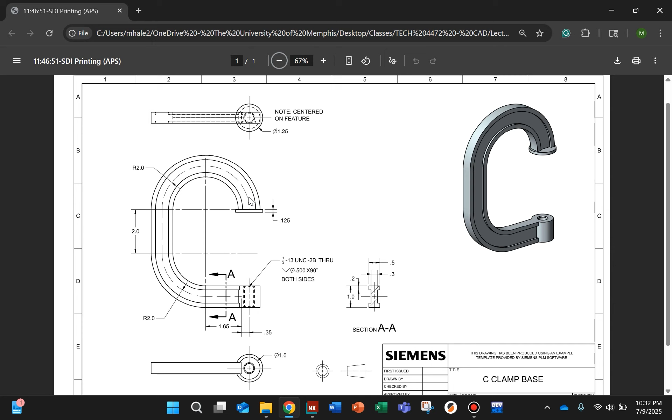So we'll use that to create our C-clamp base. With NX open, we're going to start a new model. We're going to be in inches.

We'll start with a sketch. Our sketch is going to be in the front plane, so we'll go ahead and sketch on the front. What we'll be doing is sketching this shape here - this is the cross section from this section plane right here. We will draw this shape and then we'll extrude it, we'll sweep it along a path that we make.

Back in NX, I'll use my profile tool, and we're going to use the mirror tool as well. So I'll sketch half of this, mirror it, and I'm going to leave off the top and bottom lines whenever I do this first half, dimension everything, and then when I mirror it, I'll go ahead and add in those top and bottom lines.

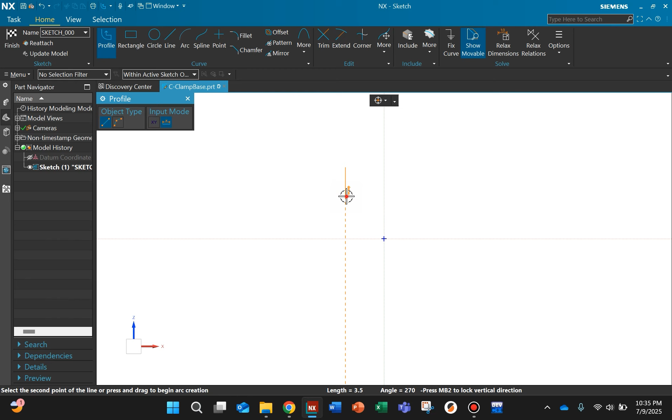We want to make sure that these two sides are symmetrical. We could have just drawn half of this and then mirrored that and mirrored this again, but we'll go ahead and just go with this approach.

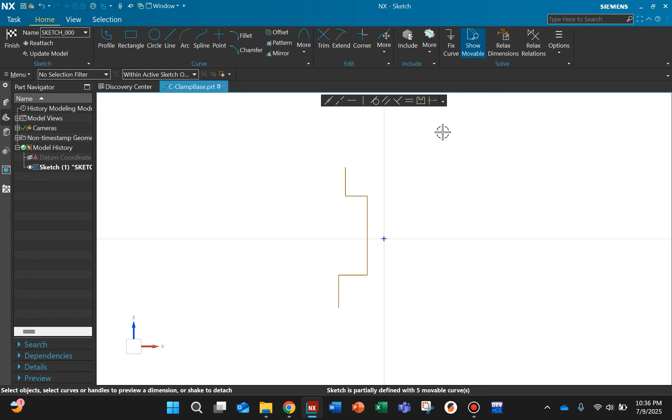So I want to make sure that this line and this line are vertically aligned, and also that they are the same length. I'm going to turn on create persistent relations. I'll do a make vertical, pick a point on this line and a point on this line, and say okay. Now, if this line were to move over, that line will move as well.

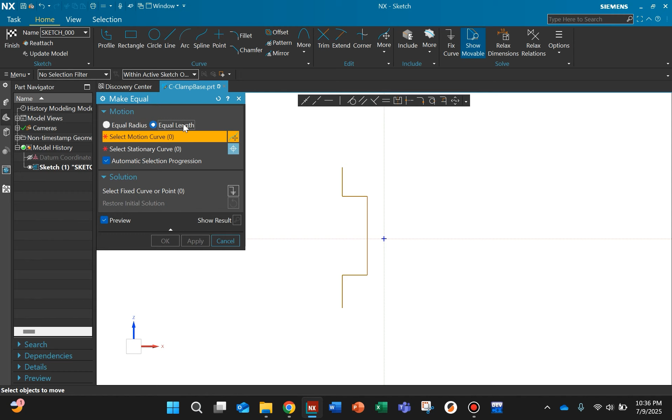Also do a make equal - an equal length constraint. I want this line and this line to be equal. I'll say okay. The other thing I'm going to do is I want the midpoint of this line to be coincident with my horizontal axis here. So I'll make coincident the midpoint of this line to our horizontal axis. I'll say okay.

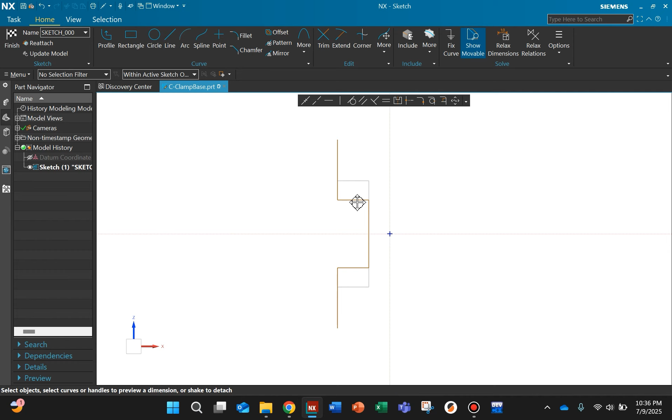Now everything's symmetrical across this horizontal axis. So if we moved one side, everything's going to move symmetrically with the other side. So let's go ahead and add our dimensions here.

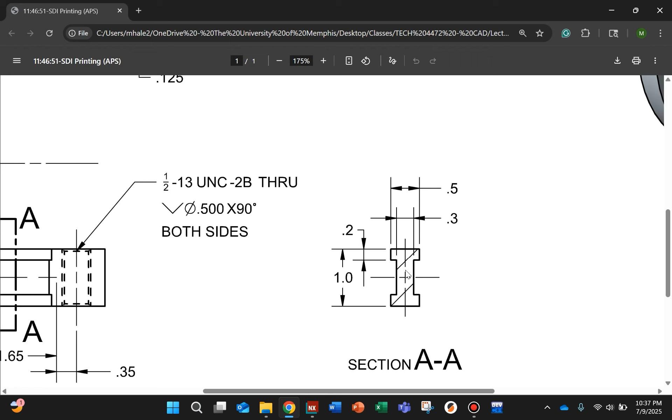This top line is 0.2 inches. The overall height is 1 inch. Overall width is 1/2 inch. And then this web is 0.3 inches. So let's go ahead and add those in - this top line here is going to be 0.2.

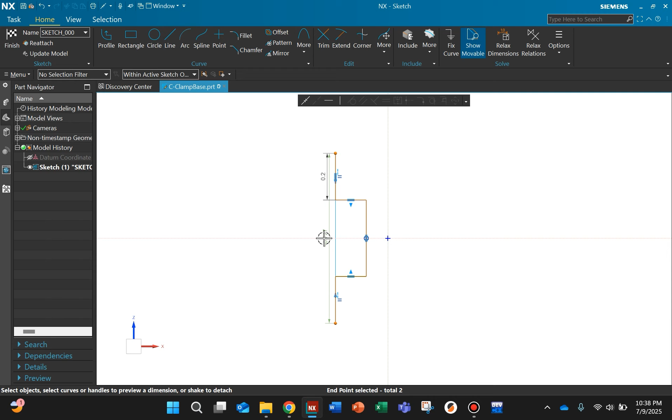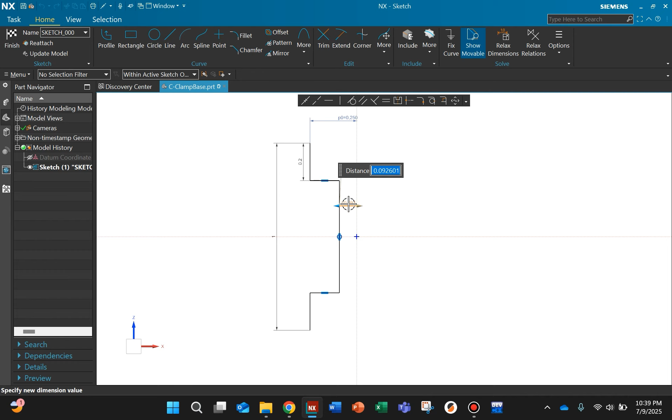Our overall height, from that top point to this bottom point, is 1 inch. The overall width is 1/2 inch, so I'll say from this line to the center equals 0.5 divided by 2, since we are dimensioning this from the center line, and then when we mirror this across, this will be a total width of 1/2 inch. Same thing with our web thickness here - this is equals 0.3 divided by 2, so that when this mirrors over, the total width is going to be 0.3 inches.

Now I'm going to go to mirror. Notice that sketch is fully defined right now. Now we're not done with this, but we do need this to be fully defined right now before we do the mirror. If your sketch is not fully defined, make sure you have those constraints that we added in and make sure you have everything dimensioned correctly.

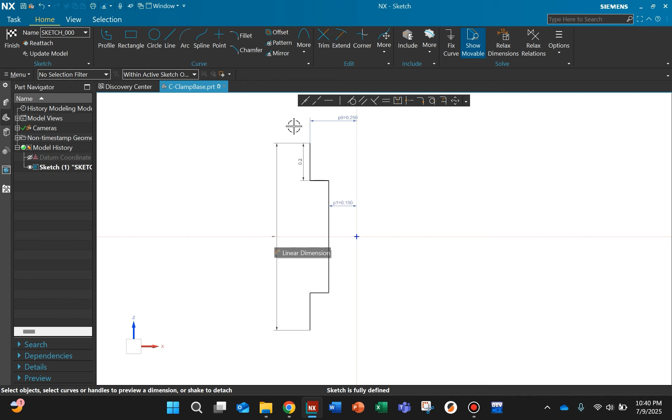So we're going to go to mirror. Before I select curves, I'm going to go down to settings. I'm going to make sure that we have create persistent relation turned on. We don't really need to convert centerline to reference because we're referencing the vertical axis here, but that's fine.

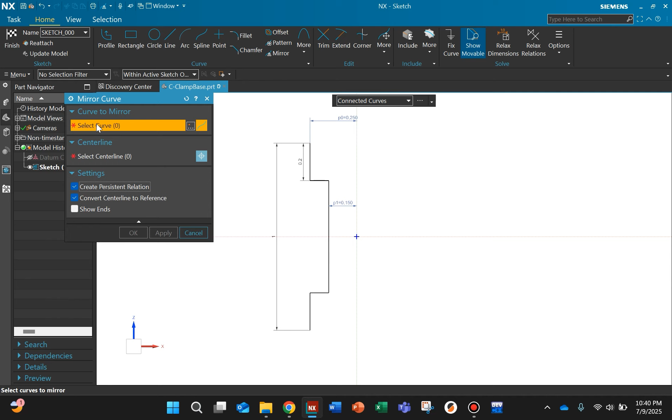The curve to mirror - we're going to make sure that we have all of our lines selected. And then we'll click on select center line, and I'm going to click on the vertical axis right here. I'll say OK. Now we have this mirrored across.

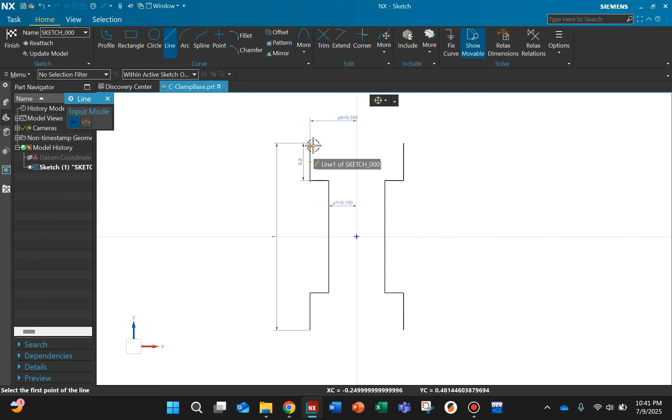I'm going to go to my line tool, and I'm just going to connect these top and bottom lines together. Sketch is fully defined, and we have our completed 2D boundary. I'll say finish.

And that is the cross section of our C-clamp base. Now to take this and create the actual C-clamp, we're going to use our sweep. To do that, we're going to need a guide, a line for the sweep to follow. So when we do the sweep, we'll select this sketch and say sweep this sketch along a path. We'll create another sketch from essentially the plane that we just sketched this section view in, and we'll create our path.

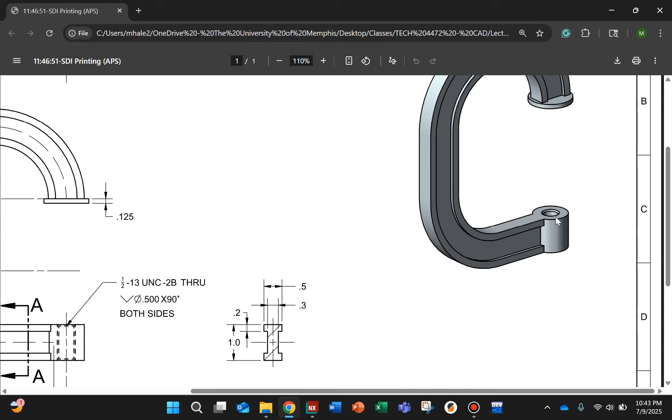Okay, so this is the center path for us to follow. I do want to point out that the section is right here. But whenever we create our path, we're going to start it at this point, where this round feature intersects our frame. So our sketch that we just created is basically located right here, not where we have our section. The section is just showing the shape.

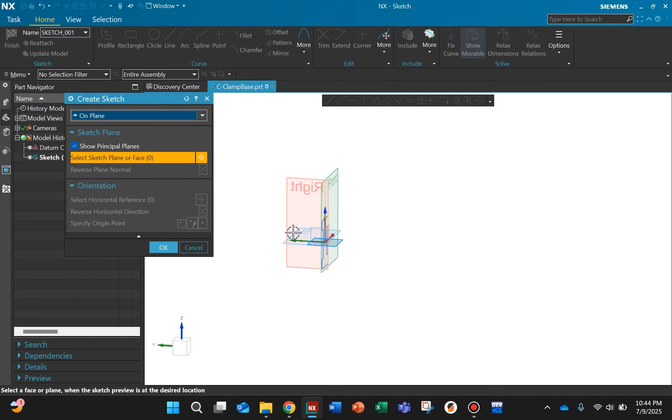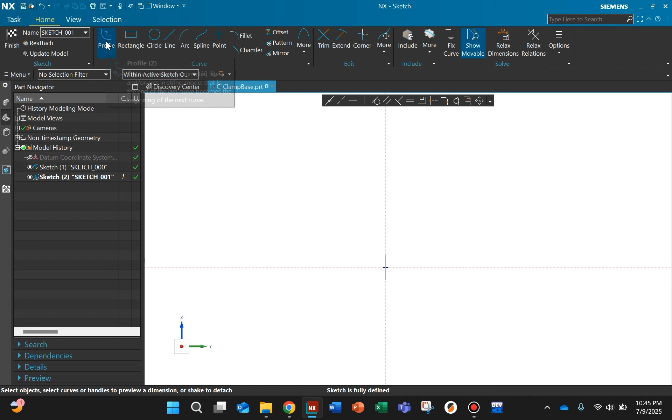So back in NX, we're going to create another sketch. This time we're going to sketch in our right plane. And here's the sketch that we just created, so we're going to create our path for the sweep to follow in the right plane. I'll go to my profile tool and make sure that we start at the origin here, at the sketch origin.

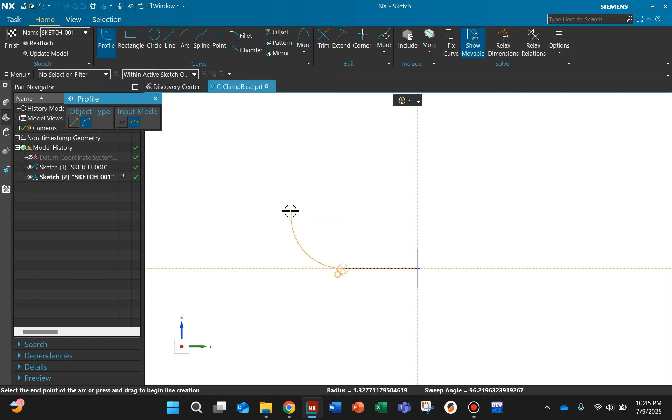And we're going to create our basic shape that we have. So we come out, and then we have our arc. I'll make sure we start here. Have our arc. And then we go vertical distance. We have another arc here. We just want to make sure that the end of this arc has a horizontal constraint with this line here.

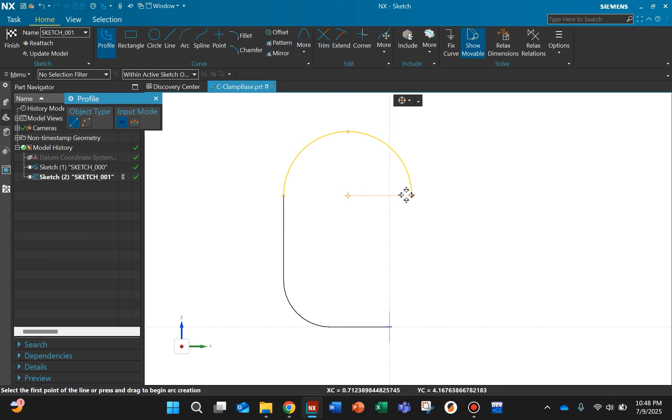If you don't get it in, that's fine, I'm just going to add it and place it there. We want this point here at the end of the arc to be aligned with this point, but I'll add that in just in case we didn't get it there. So we should have something that looks like this. We'll go ahead and start adding in our dimensions here. So we're done with our profile tool.

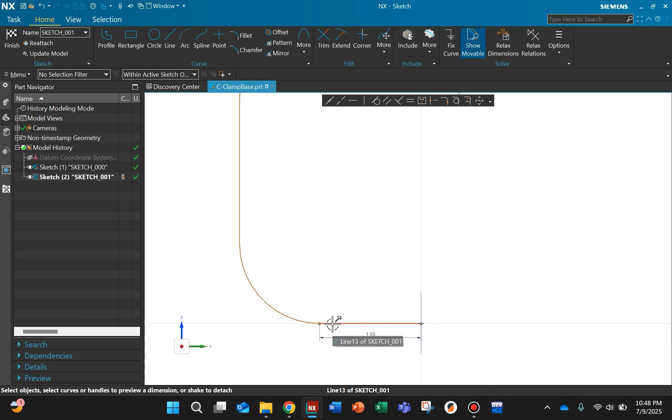Let's start adding in our dimensions. So this line here is going to be 1.65 - that is the length of this line up into where the arc begins. Then the arc has a radius of 2.

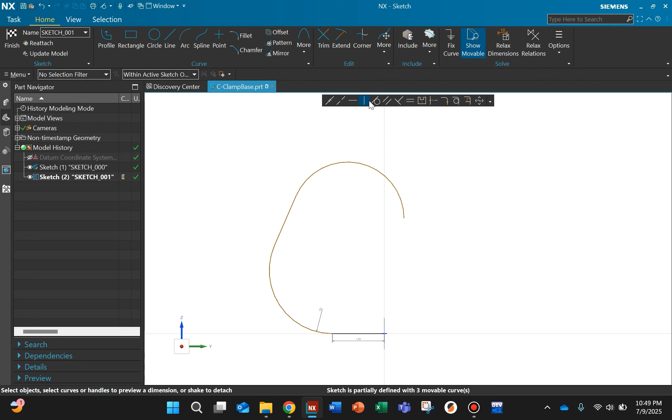And if something like this happens, that's fine. What we'll do is a make tangent between this line and this curve. We'll say OK, and then we'll do a make vertical on this line.

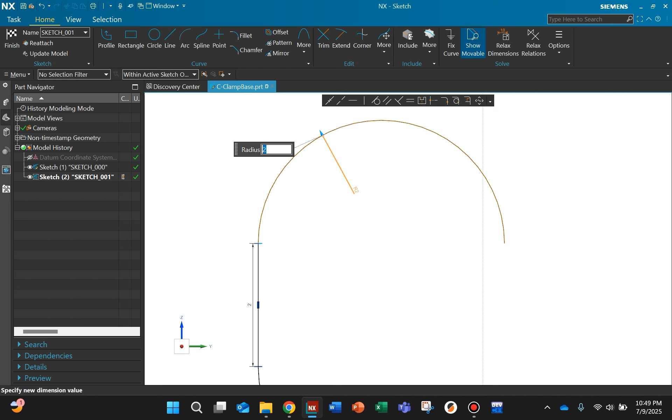Clear that up. This line, the length of this line, is going to be 2 inches. This arc has a radius of 2 inches as well. We could also do a make equal constraint and say that those are going to be equal, but we'll leave it at that.

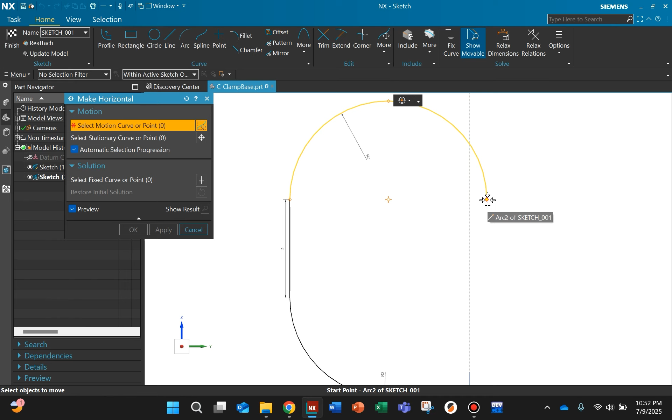And you want to make sure that this point here and this point are horizontal. So we'll do a make horizontal constraint where we select endpoint and the endpoint. We'll say OK - make horizontal constraint with the endpoints so that they are horizontally aligned together.

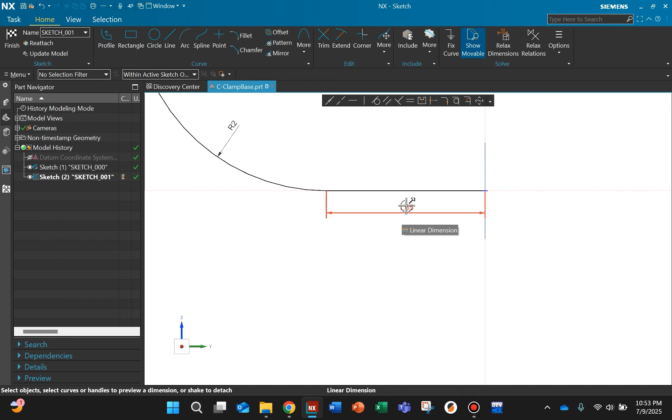The radius of 2 inches on both of the arcs. This vertical line is 2 inches. This horizontal line is 1.65 inches. And we'll say sketch is fully defined. We'll say finish.

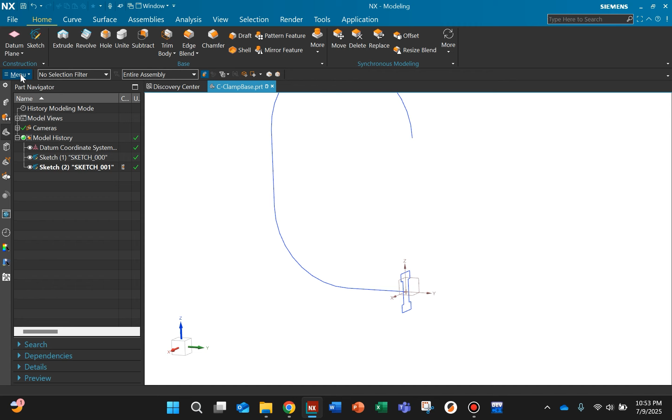Hopefully you can see kind of what we're doing here now. So here is our section view. Here's the section plane of our C-clamp base. And we want to sweep this along this path. So to go to the sweep, we'll go to menu, over here, and go to insert. And down about here we see a sweep.

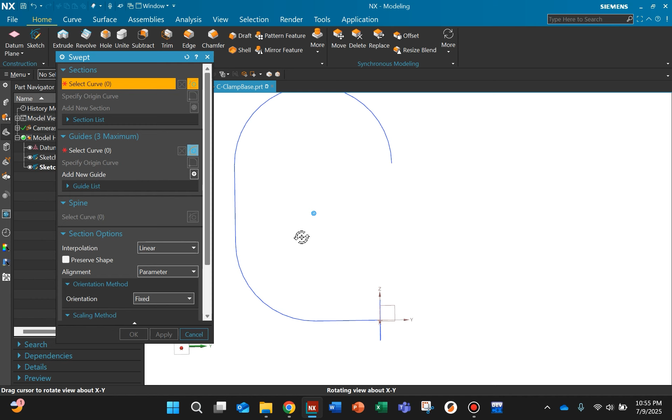There are a few options for the sweep. We want just the swept, so we do sweep, swept. What the swept tool is going to ask us for is the curve - the section that's going to be swept - and the guide, our path that we select. We can have more than one, we're just going to have the one here. There are different ways that we can actually sweep this section along the path. We'll go to preserve shape, but we can worry about that here in a second.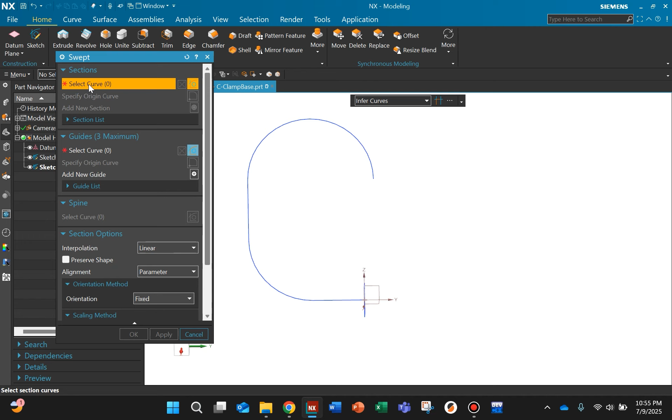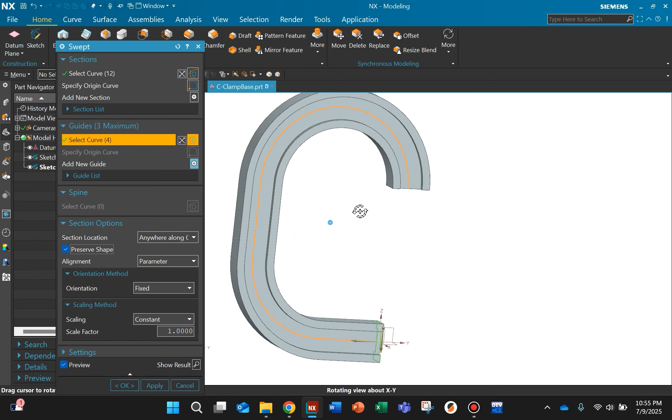So the section that we want to select is going to be our profile shape. We'll go to select curve, and select the sketch path that we created. We want to make sure that preserve shape is checkmarked, so we're preserving this shape along this path. And we'll say OK. And there is the frame of our C-clamp.

All right, let's work on the threaded hole part. So let's look at it from the bottom view. We have a round feature that is 1 inch in diameter. It is the same height as the frame itself, so 1 inch. And it's located 0.35 inches from the edge of our sketch here.

So we'll go back to NX. We'll create a sketch, this time on our top face.

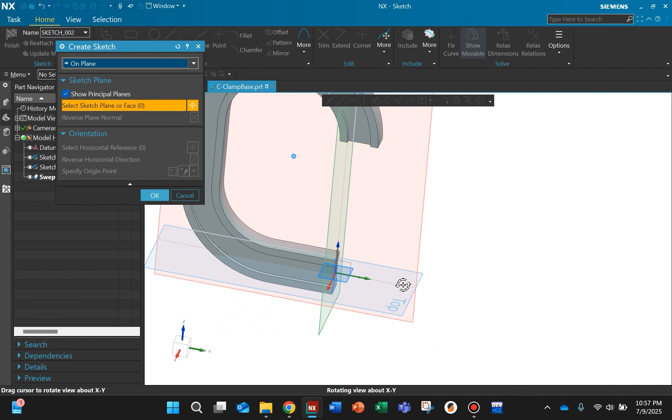This can be a little weird to look at. So we're sketching on this plane here, but you're kind of looking at it through the top. You could go to edit section and divide that off if you want to. I'm just going to keep it like this because this part is not super complicated.

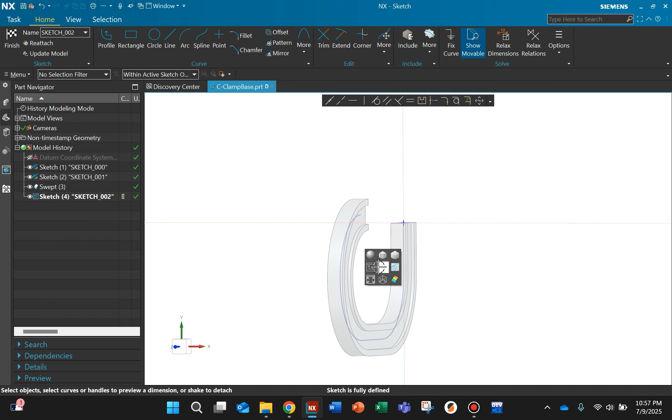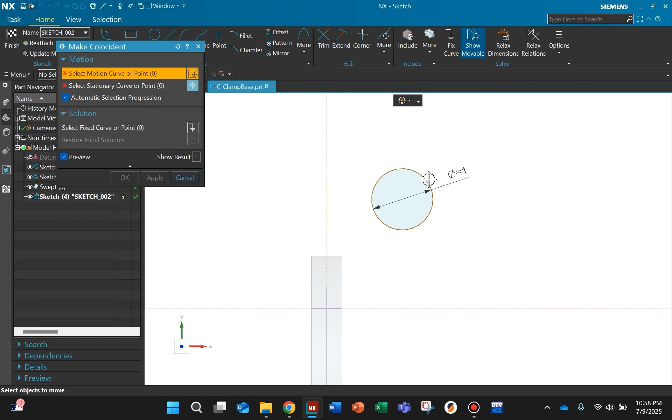So we're going to have a circle. I'm just going to create the circle over here. I'll give this a diameter of 1 inch. I want the center of this to be coincident with my vertical axis here. So I'll do a make coincident, center of that to my vertical axis. I'll say OK.

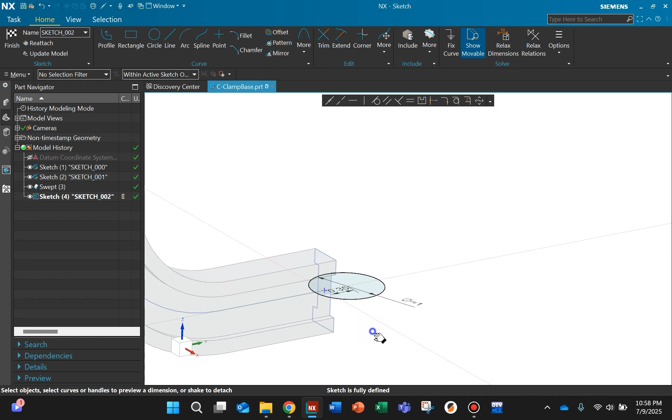And the center of this is also going to be located 0.35 inches from the horizontal axis. 0.35 inches. So it should look like this. We're intersecting into the base. Sketch is fully defined. I'll say finish.

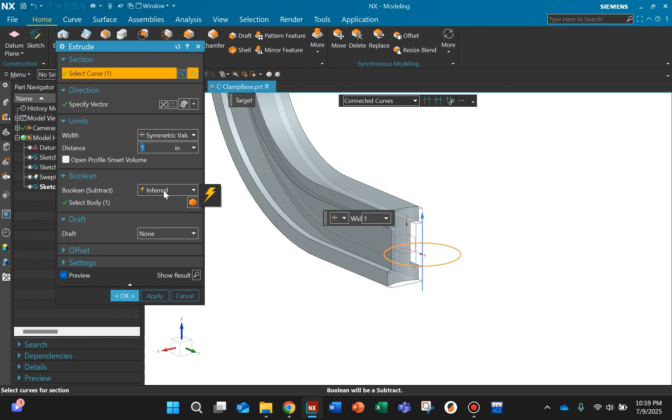I'll go ahead and go to extrude. For the value, I'm going to do symmetric value, 1 inch for our symmetric value. Right now, if we look at the Boolean, it's thinking that we want to subtract material, but we don't. We actually want to add. So we will go to unite. So we're uniting with the base that we have. I'll say show results just to make sure that looks okay. Yeah, that looks good to me.

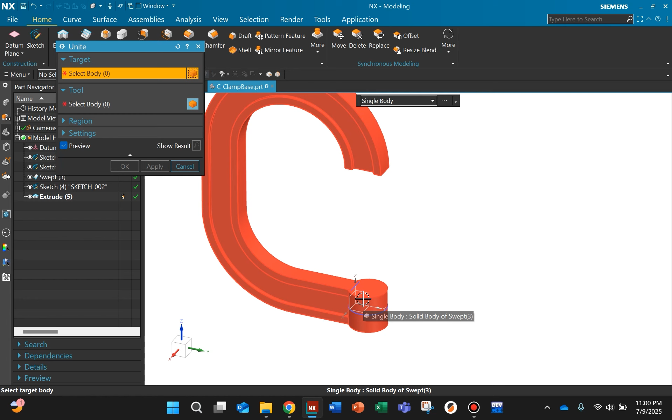So we'll say okay. Remember, if you want to double check to make sure that you have everything united correctly, you can always come up here to unite. And when you hover over the solid bodies that you have, if everything is highlighted all at once, you know everything is united. If, for example, this was highlighted red, but the base wasn't, then we have two individual solid bodies, and that's not what we want. So we do want everything highlighted red.

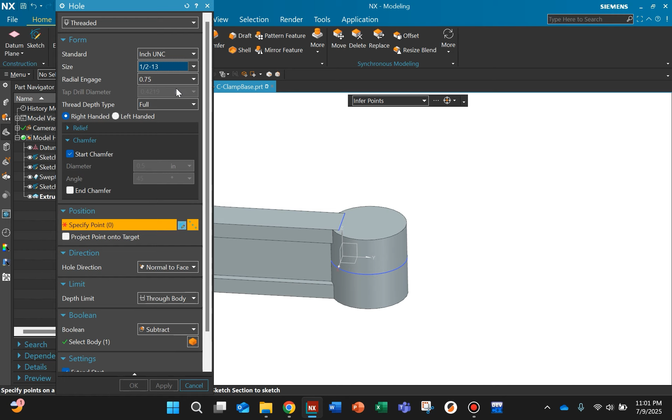And we do have a threaded hole. This is a 1/2 inch 13 UNC. It's all the way through, and we have both sides with a chamfer on them. Go back in NX, we'll go to our hole tool. This is a threaded hole. This will be a 1/2 inch 13 UNC. On chamfer, we want start chamfer and end chamfer.

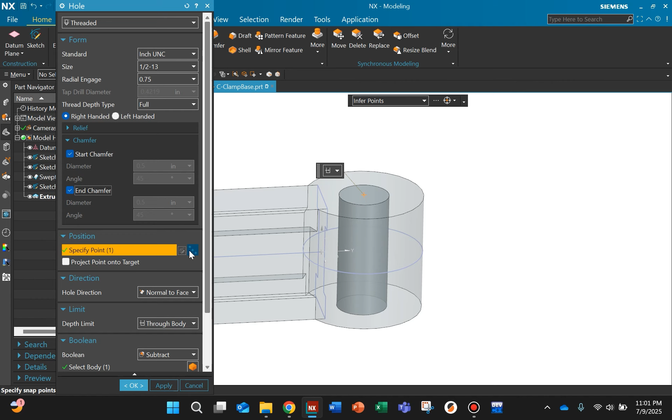And we can just pick up the center mark for the edge of the extrude here. So we don't need to go into a sketch or anything. We can just pick up the center of this arc. The thread depth is full, and the limit is going to be through body. I'll say show results. Looks good to me. I'll say okay.

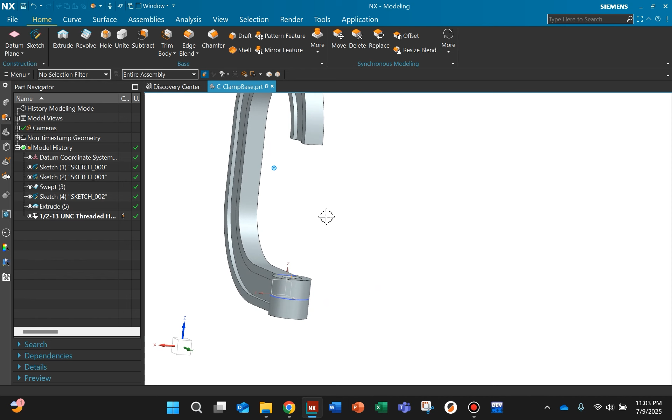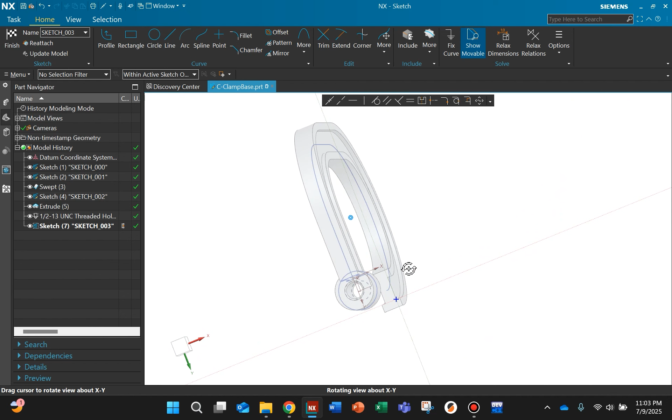I'll say sketch. I want to sketch on this surface. So we're looking at the bottom of the C-clamp right there. I'll say okay. So now we're looking at the reverse of what we were looking at before. When we created this feature, we were looking at it like this. Now we're looking at it like this, and that's totally fine. So I'll do a circle. I'm just going to make it somewhere over here. The diameter of this is 1.25, so 1.25 diameter.

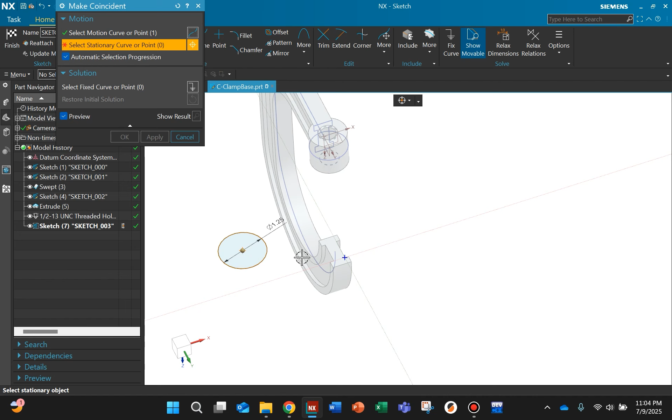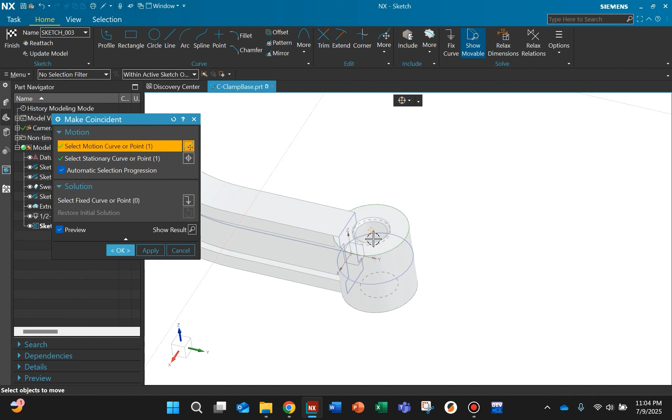And now to align this, I'll do a make coincident. I want the center of this to be aligned with the center of this feature here. It's not in our active sketch, so we're going to change our scope to within work part only. And I'm going to pick up the center of the extrude. You could do the center of the arc that we made in the sketch itself. Either way is fine.

Oops, let's see. I think I picked up the edge. Make sure you pick up the center. That looks better. So I'll say okay. Sketch is fully defined.

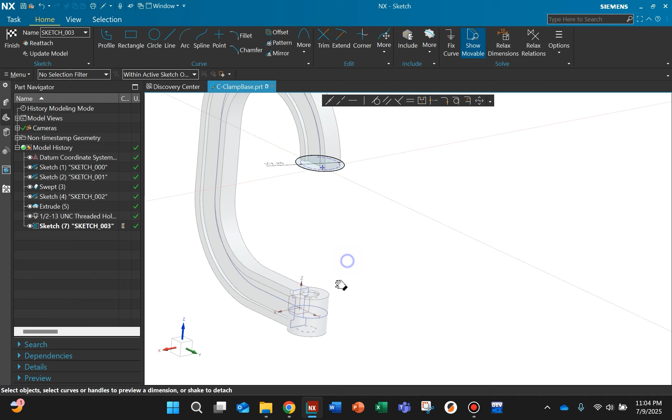So right now this is 0.35 inches away, but let's say we change that to 0.25. So this whole feature would move towards the inside of the clamp, and this would move as well. And so that's the design intent that we're told, and that's what we'll keep. I'll say finish.

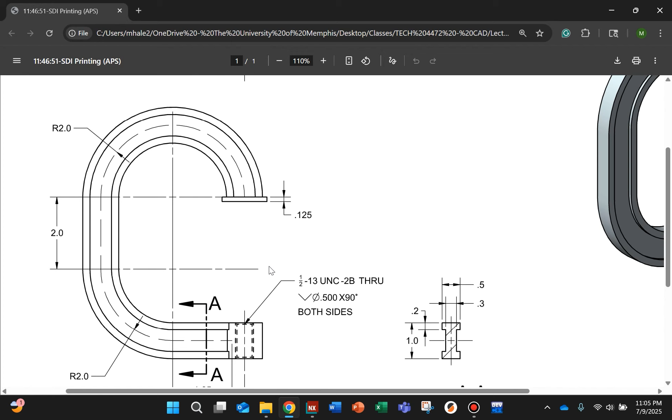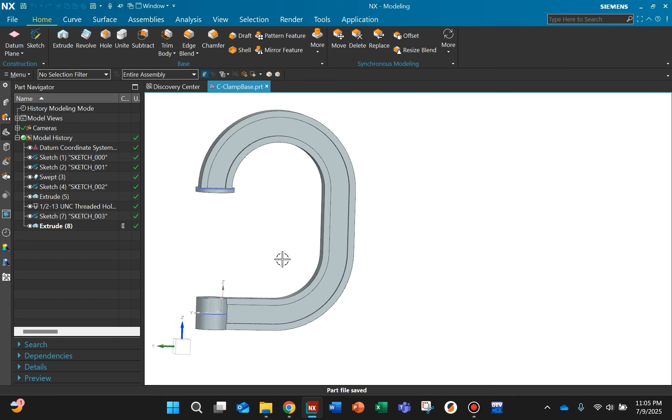We're going to extrude this out a distance of 0.125, an eighth of an inch. So we'll say extrude. Make sure that we are going down. Distance of 0.125. And I do want to unite this. We are uniting it with our frame. We'll say OK. Make sure that we save this. And that is the frame of our C-clamp.

So make sure that you save this file and submit it to the Dropbox on Canvas.